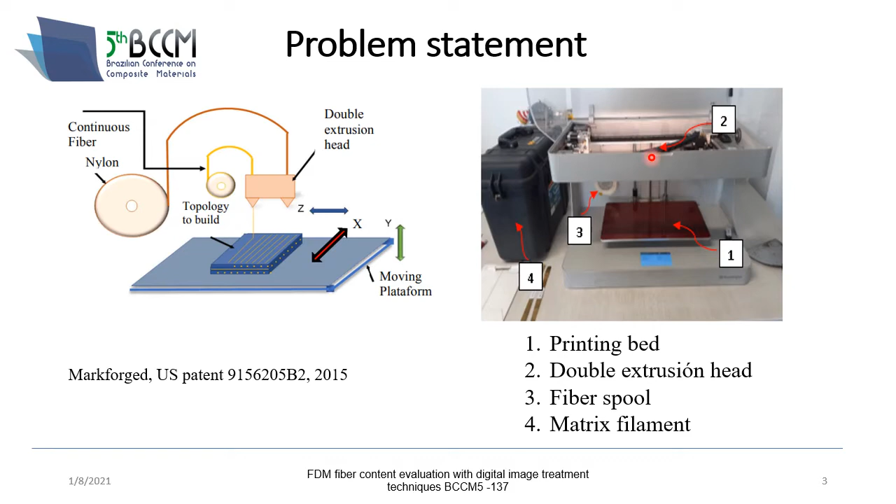as well as the volumetric quantity. At the right, we have an image of a Markforged Mark II, which is the 3D printer employed in this research. We have here the matrix filament, which is kept safe from moisture in the air. We have the fiber spool, the double extrusion head, which can move relative to this platform. So if we want to design with this process, we have to know first the mechanical properties as well as the material properties to know the stiffness and strength of a composite additive manufacturing material.

Here in this figure, we have the schematic of the fusion process. We have the spool that is fed through the extruder nozzle. We have a cutter which helps to determine the specific length of fibers that need to be deposited. So in a way to determine the mechanical properties, we need the volumetric fiber content of the part.

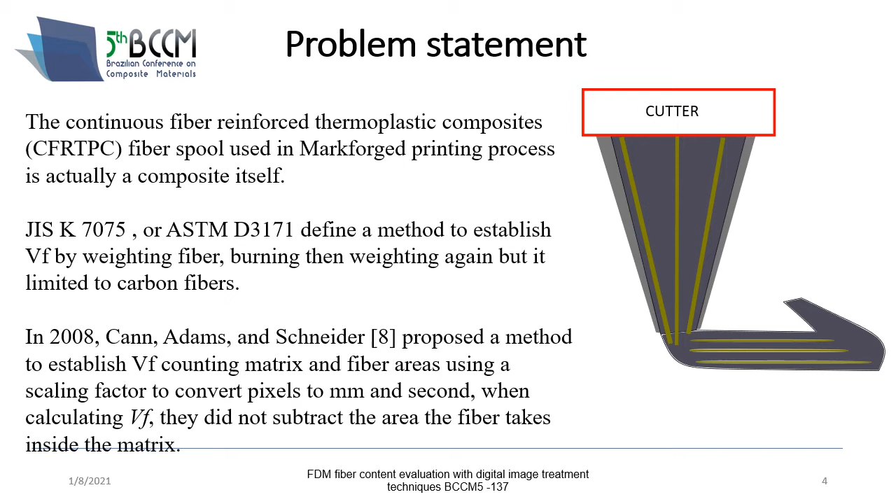There are some methods like the JIS K 7075, which defines a method to establish the volumetric fiber fraction by burning the whole composite and then weighing again the remaining residue. This has a problem that it is limited to carbon fiber, which has a great fusion temperature. Other methods are thermogravimetric analysis, and in 2008, Cann, Adams, and Schneider proposed a method to establish the volumetric fiber fraction by counting the matrix and fiber areas using a scaling factor. So using optical methods and digital image techniques.

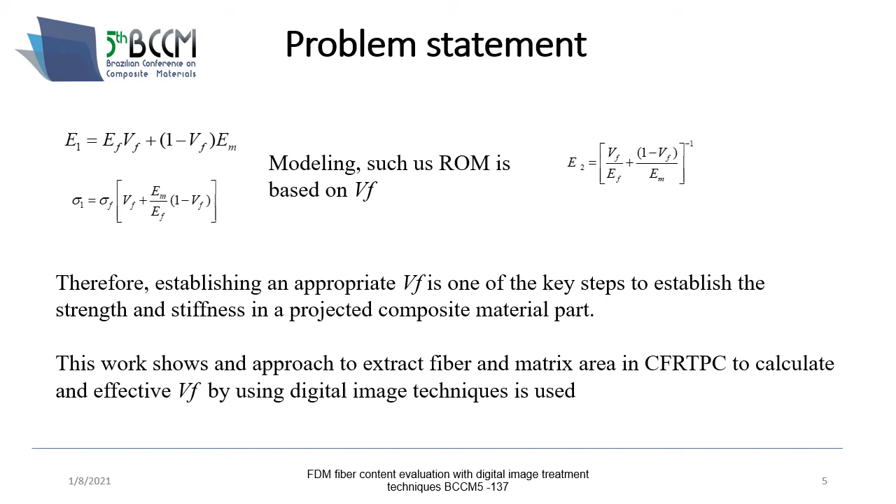One of the advantages of knowing the volumetric fiber fraction is to employ methods such as the rule of mixture or the inverse rule of mixture that are based on the volumetric fiber fraction. So this work shows an approach to extract matrix and fiber characteristics in continuous fiber reinforced thermoplastic composite, and calculate the volumetric fraction by using digital image techniques.

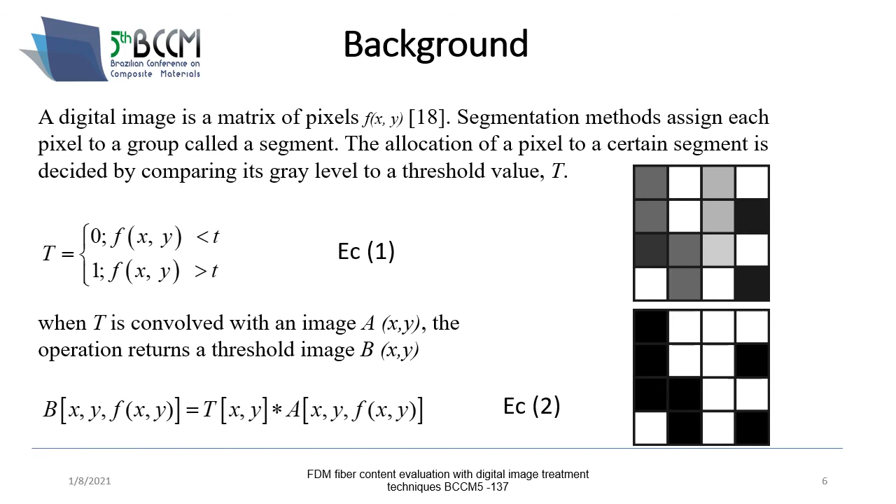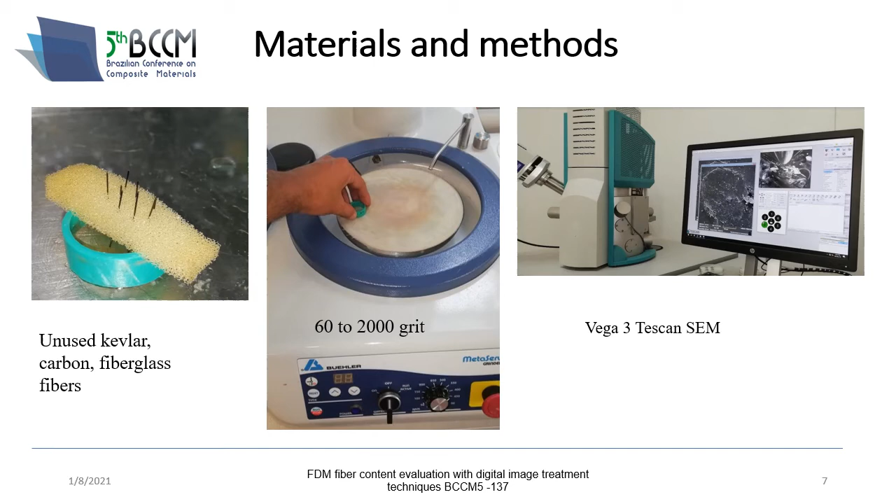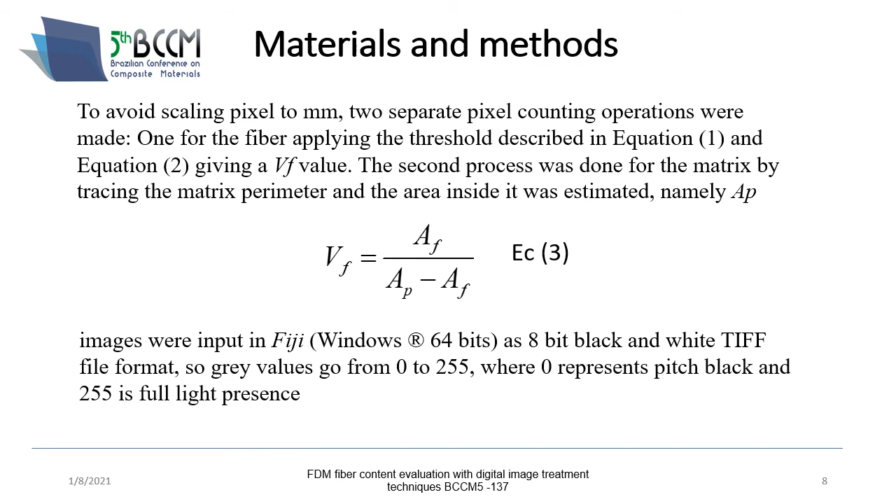So to avoid scaling pixel to millimeter, we take 2 separate fields, and counting operations were made. One for fiber applying the threshold described in equation 1, and equation 2 giving a volumetric fiber fraction. The second process was done for the matrix by tracing the matrix perimeter and the area inside it was estimated, namely AP, and the volumetric fiber fraction was calculated using the total area of the fibers divided by AP minus AF. We use the image in Fiji software in 8-bit black and white TIFF file format.

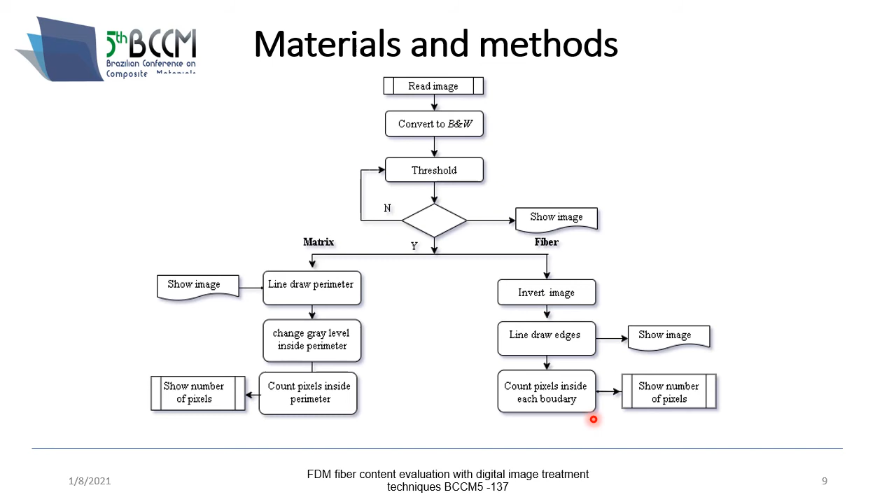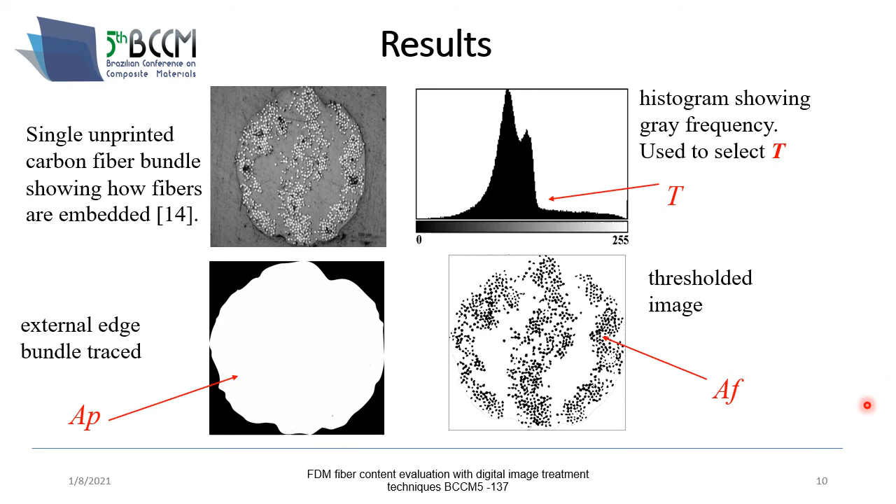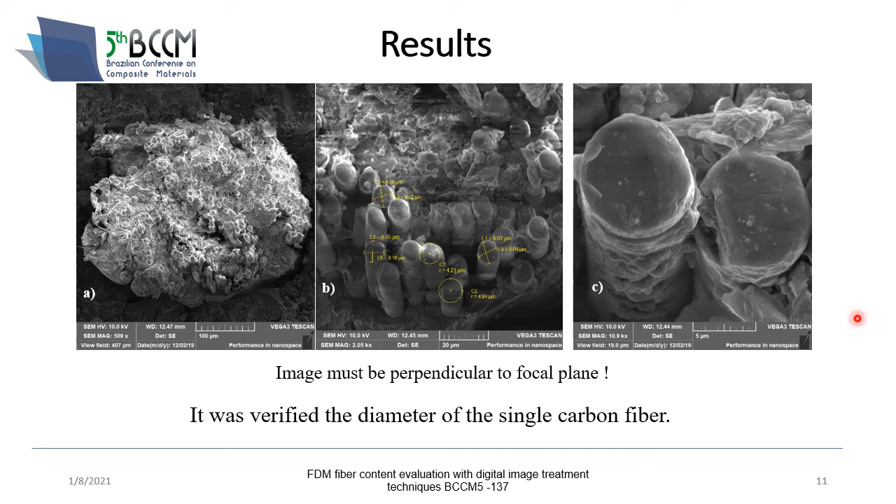Some of the results were inaccurate due to the fibers being placed non-perpendicular to the focal plane. So we can verify the diameter of the carbon fibers, the distribution, and the matrix, but it was difficult to observe the fiber volumetric fraction in images that weren't perpendicular to the focal plane.

Conclusions. Image treatment techniques were used to extract fiber and matrix areas to obtain the ratio between them. The ratio is called volumetric fiber content, Vf, that for the carbon fiber reinforced thermoplastic polymer was around 35%. The proposed method works for continuous fiber reinforced composite. It was tested with a thermoplastic matrix. And this method is not recommended to be used in short fiber reinforced composite because it only analyzes a transversal area instead of the whole volume, potentially leaving out zones with different volumetric fiber fraction.

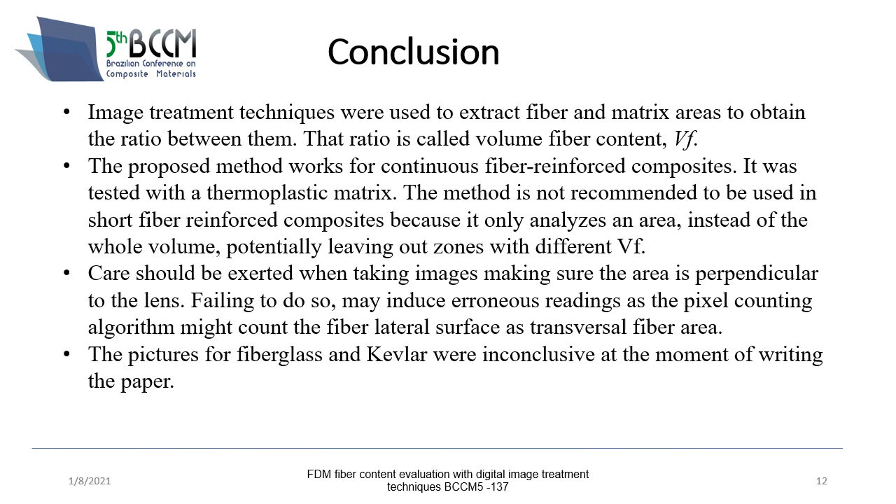Also, care should be exerted when taking images, making sure that the area is perpendicular to the lens. Failing to do so may induce erroneous readings as the pixel counting algorithm might count the fiber lateral surface as transversal fiber area. Finally, the pictures for fiberglass and Kevlar were inconclusive at the moment of writing this paper. Here are some of the references employed.